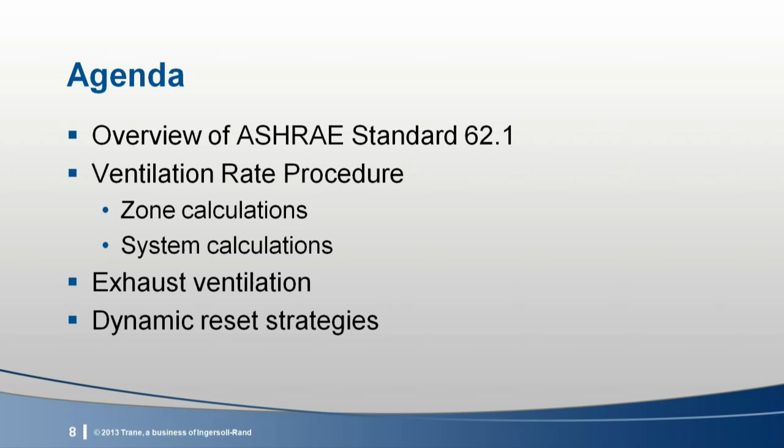During today's program, Trane Applications engineers Dennis Stanke, Paul Solberg, and John Murphy will take us through a discussion of the requirements of Standard 62.1, with specific focus on the ventilation rate procedure for calculating ventilation requirements. Dennis, who is a longtime member and recent chair of the Standard 62 Committee, will start us off with an overview of this standard. Then the guys will step us through how to use the ventilation rate procedure to determine the ventilation requirement for each zone and how much outdoor air must be brought in at the system level intake. And later, Paul and Dennis will touch on exhaust requirements and discuss various dynamic reset strategies for saving energy required to condition this ventilation air.

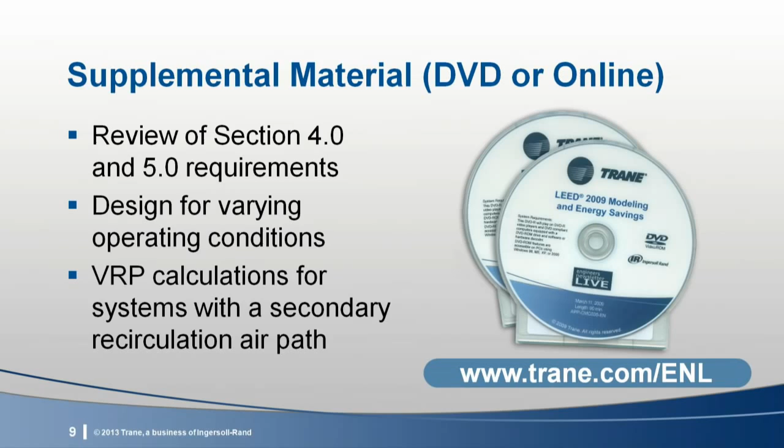Dennis, go ahead and get us started.

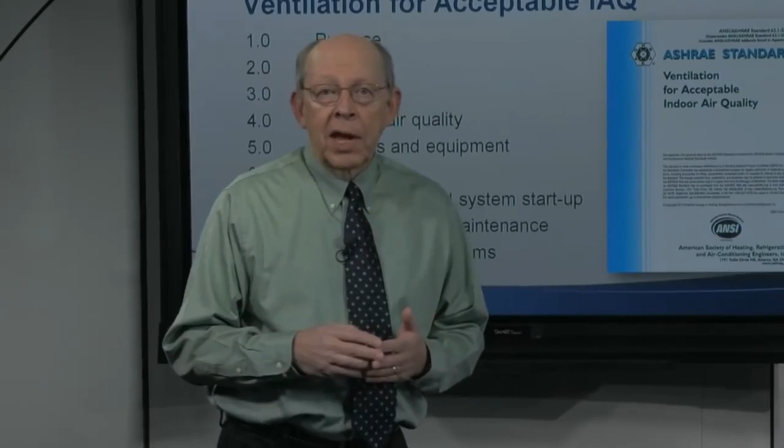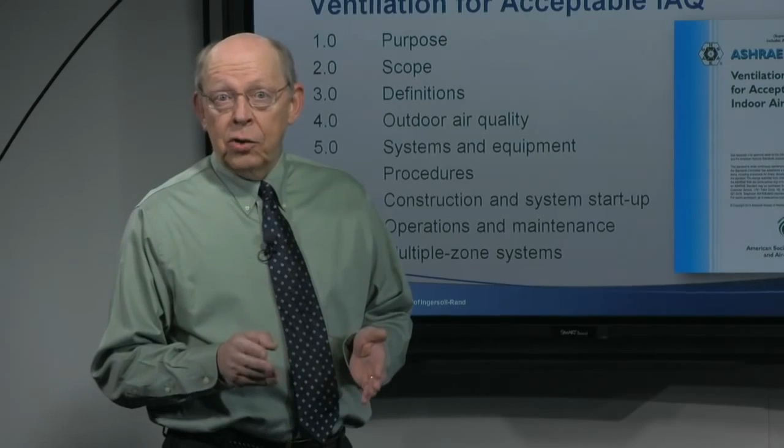Okay, first I want to thank all of you for watching these presentations. We've been doing them for many years, and I hope that you find them of value. I don't know how many of these I've been involved with, but I'm happy to say that this is my last one. So in case I forget to say it later, I've enjoyed talking to you periodically, and I hope that you continue to attend long after I've retired to New Orleans, for example.

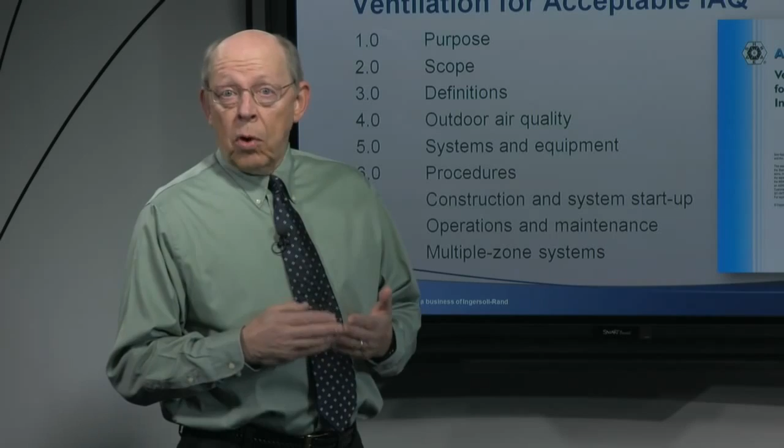Its requirements are organized in sections as follows: outdoor air quality assessment in Section 4, provisions for systems and equipment in Section 5, ventilation rates and calculation procedures in Section 6, construction and startup requirements in Section 7, and finally, operation and maintenance requirements in Section 8.

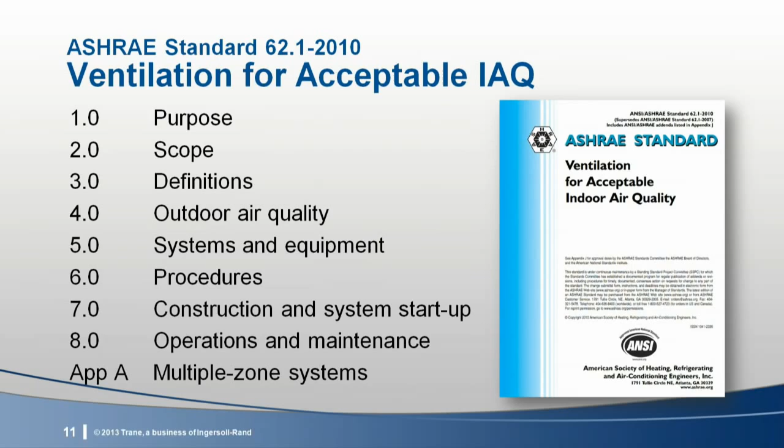Normative Appendix A, which expands on Section 6 requirements, is also part of the standard. The standard is written in mandatory language so that it can be easily adopted by codes and can be used as a solid technical reference document for other standards, for energy labels, and for building rating systems.

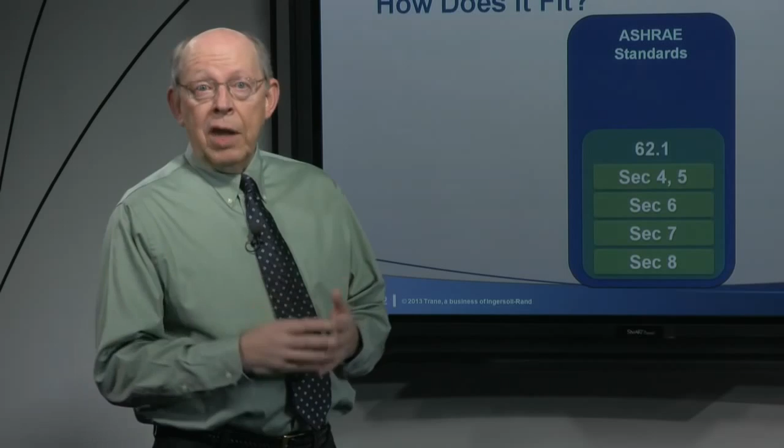This diagram attempts to show how the standard fits. First, here's Standard 62 broken down by section. Traditionally, Section 6 is most important for the model mechanical codes and many local building codes. Its ventilation rates and procedures appear in over 11,000 code jurisdictions.

To comply with ASHRAE Standard 189.1, the High Performance Building Standard, building designs must meet virtually all Standard 62 requirements. And the International Green Construction Code allows Standard 189.1 as a project compliance option. Projects following this option include all Standard 62 requirements referenced in the Standard 189.1 document.

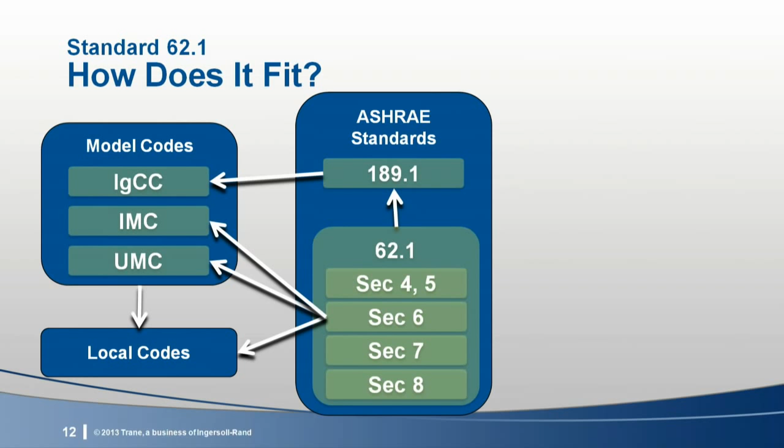Some building owners want to pursue a building energy label, like Energy Star or the ASHRAE Building Energy Quotient label. To comply with the Energy Star, all 62.1 requirements must be met. And since the ASHRAE BEQ label requires Energy Star compliance, again, all 62.1 requirements must be met.

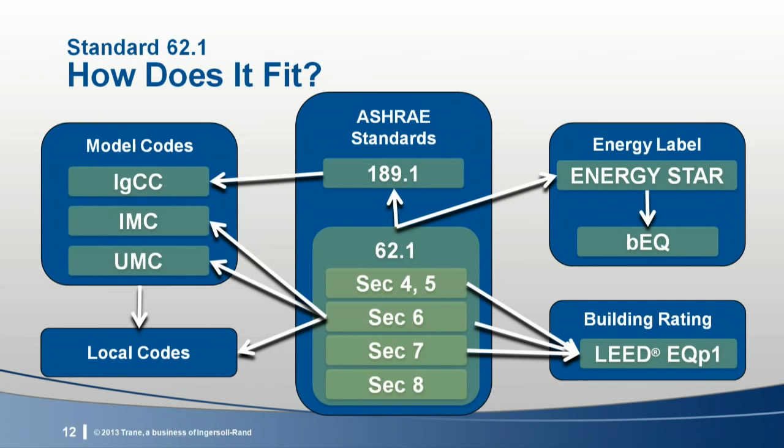And of course, many building projects these days seek LEED certification. The first LEED indoor environmental quality prerequisite requires compliance with the provisions in sections 4 through 7 of Standard 62.1. So you can see this ventilation standard provides the basis for building codes, energy labels, and building rating systems.

Okay, back to the standard to give you that quick overview that I promised. Section 4 addresses outdoor air quality. It requires designers to consider potential outdoor contaminants both in the region and immediate vicinity of the building site.

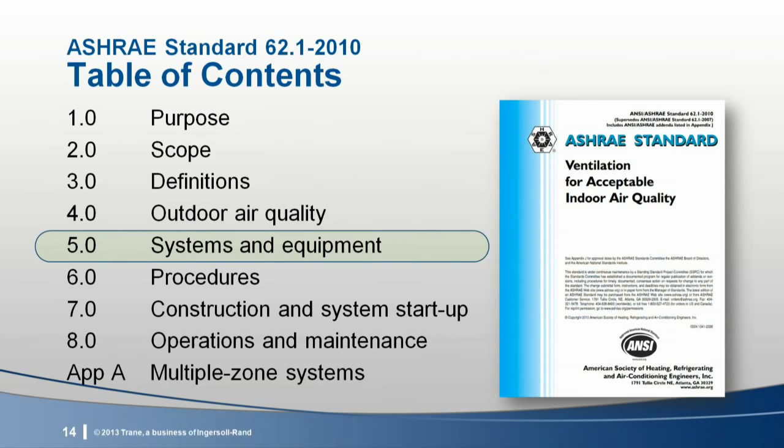Section 5 covers a broad range of requirements for ventilation systems and equipment. When met, these requirements should help to establish a baseline for building contaminant emissions so that the prescribed ventilation rates and procedures in Section 6 can actually be expected to work.

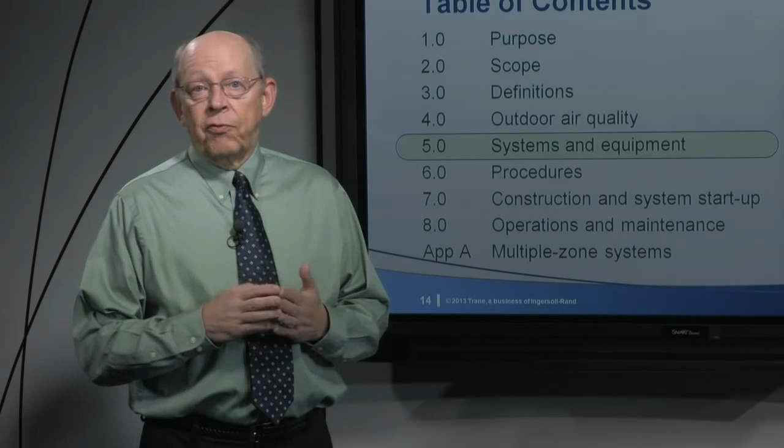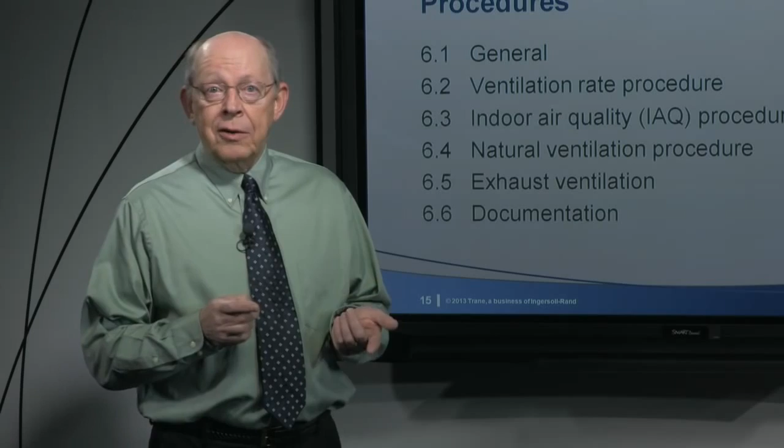These sections cover a lot of ground, so we've included them in the supplemental material since we want to focus on Section 6 today. Turning now to the procedures for finding design ventilation requirements in Section 6, the standard includes 3 alternative design procedures for finding minimum outdoor airflow rates: the ventilation rate procedure, the IAQ procedure, and the natural ventilation procedure.

And it includes exhaust airflow requirements in a separate section because they apply regardless of the design procedure used to determine the minimum outdoor airflow rates.

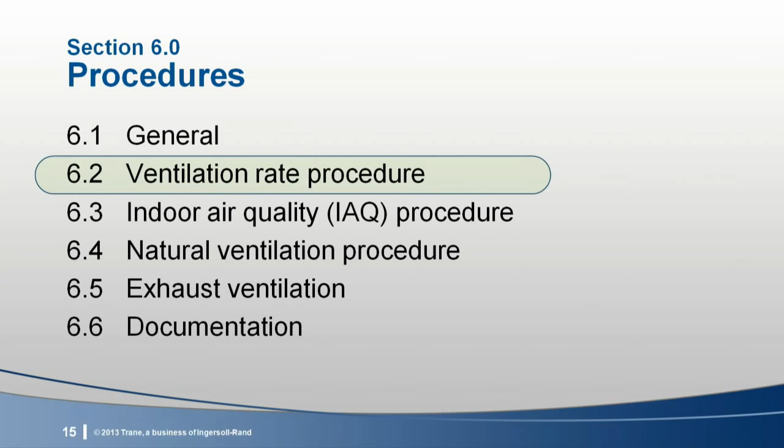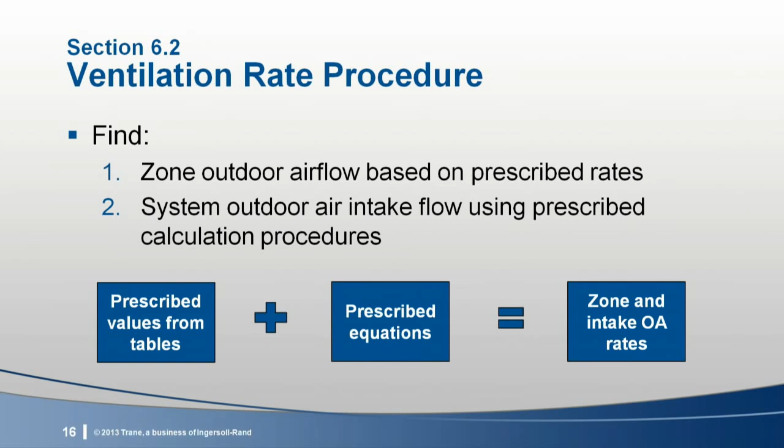The ventilation rate procedure is most widely used. It prescribes zone-level outdoor airflow rates in a table, and it prescribes equations and calculation procedures needed to find both zone and system-level rates. Most designers understand it and use it, and it's the basis for mechanical codes. Of course, it has a few tricky spots, so we'll go over an example a little bit later.

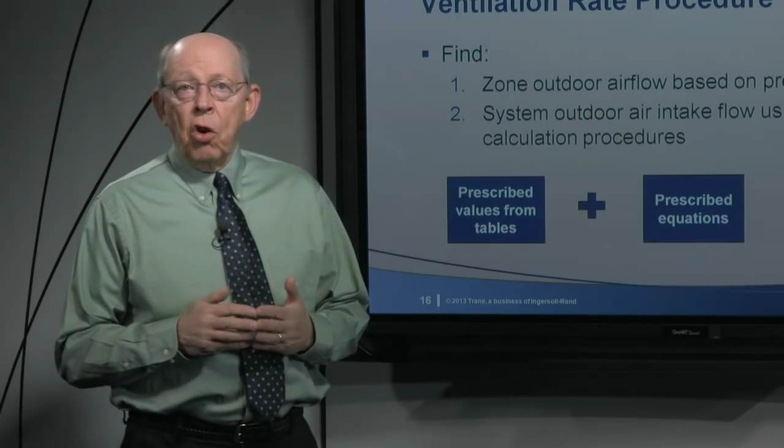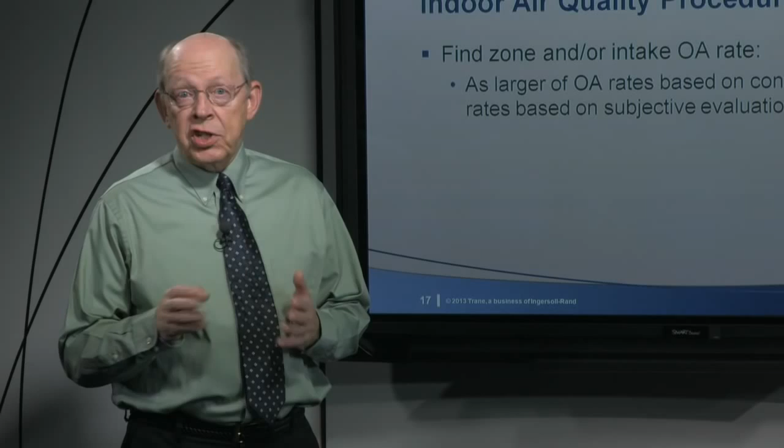Next is the indoor air quality procedure. Designers find minimum zone and system intake rates based on contaminant levels and subjective evaluation, proceeding as follows. First, identify all contaminants and mixtures of concern, sources and source strengths, and target contaminant and mixture concentrations. Second, use mass balance equations, accounting for any air cleaning devices, to find the zone and intake rates needed to control contaminant levels.

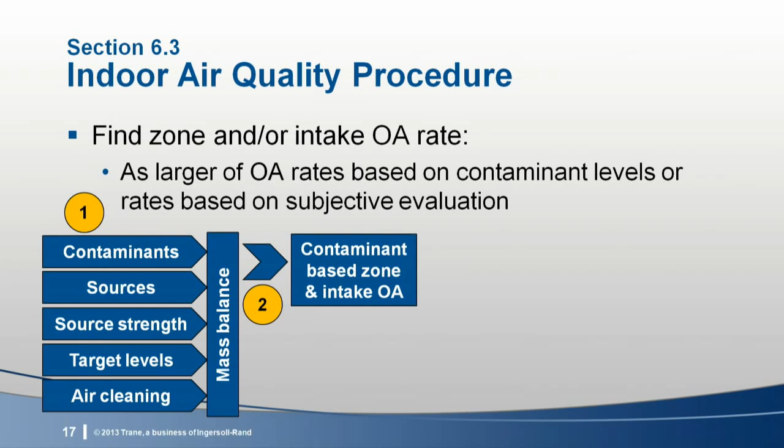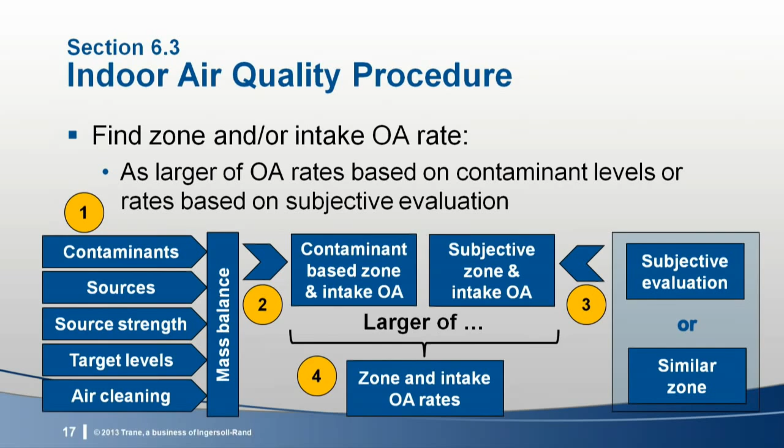Control contaminant levels to less than or equal to the target concentrations. Third, in the completed building, use a subjective evaluation in each zone to find zone and intake rates that satisfy occupants, or use the rates found by subjective evaluation in a substantially similar zone in an existing building. Finally, compare the zone and intake rates found using the mass balance approach to those found using the subjective evaluation approach, and use the larger of these rates.

Designers must perform both a mass balance analysis and a subjective evaluation to comply with the IAQ procedure. This requires a lot of work, a lot of judgment, and risk, not to mention a variance from most code authorities. That's why very few one-of-a-kind building designers pursue it, why Standard 189.1 doesn't allow it, and why LEED has traditionally not allowed it. It's probably best suited for buildings with repeated identical designs, like retail chain stores.

I recently wrote an ASHRAE journal article about the IAQ procedure, showing in detail how it might be met. We included a reference to this article in the bibliography, but we're not discussing it in detail today.

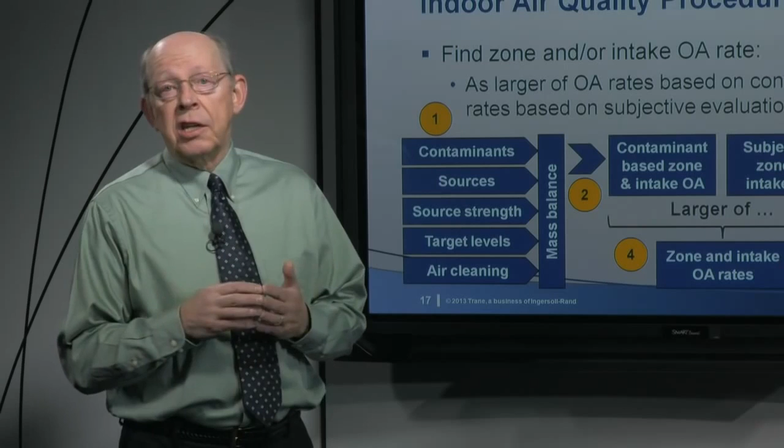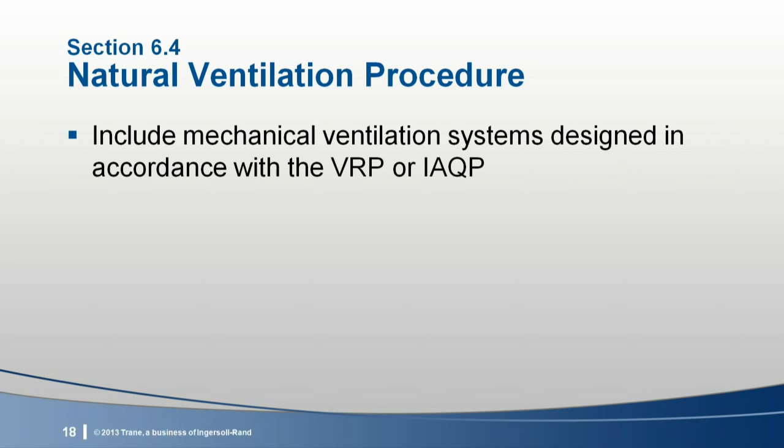Finally, the natural ventilation procedure provides for passive ventilation using only natural forces to move outdoor air through the zone. It requires that any natural ventilation system also include a mechanical system designed using either the ventilation rate procedure or the IAQ procedure. A mechanical system is needed to provide outdoor air during those times when the local openings must be closed.

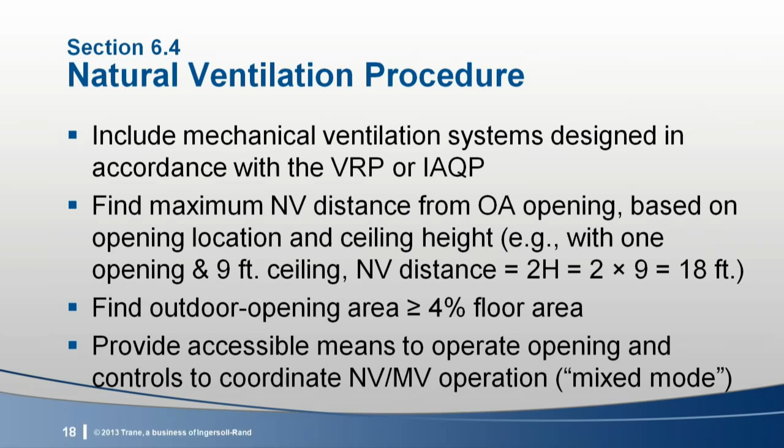To comply, first find how far outdoor air can be expected to penetrate into the occupied zone. This depends on the location of openings and the ceiling height. Next, find the area of the outdoor opening. It must be no less than 4% of the naturally ventilated floor area. Finally, provide readily accessible means for occupants to adjust the outdoor openings and provide controls to coordinate the operation of natural and mechanical ventilation systems.

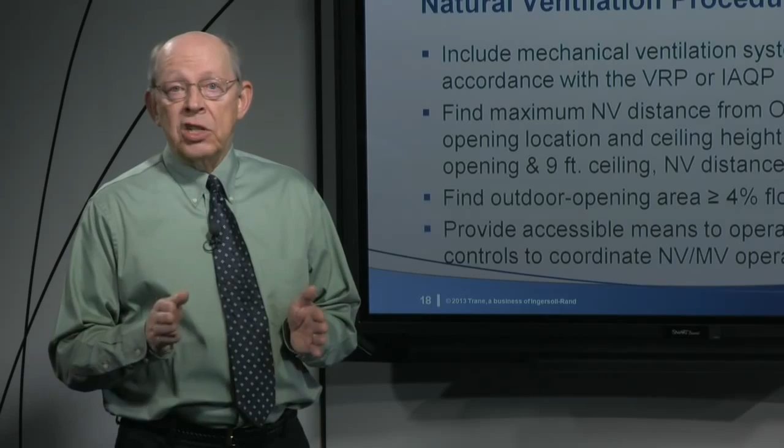Mixed mode ventilation is required because virtually all naturally ventilated buildings need mechanical ventilation at some point. For example, occupants may close local openings due to rain, wind, heat, cold, outdoor pollution, outdoor noise, and so on. As with the IAQ procedure, we're not discussing the natural ventilation procedure in any detail today.

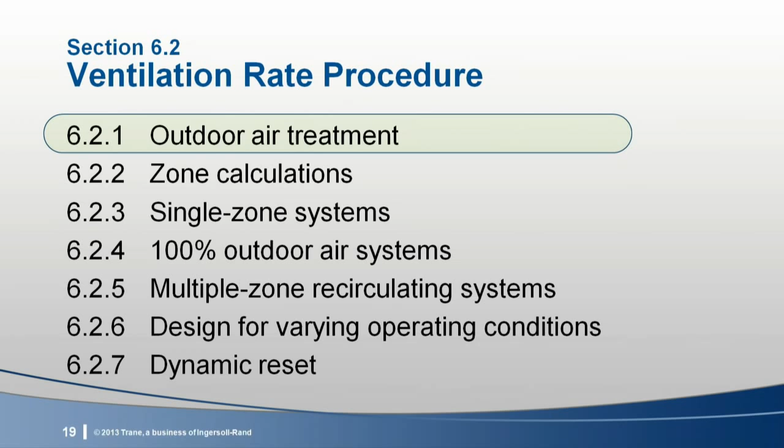Today, we're focused on the ventilation rate procedure. It covers outdoor air treatment, zone level and system level outdoor airflow calculations, an optional averaging approach to design for varying operating conditions, and an optional control approach to reset outdoor airflow dynamically.

Before we turn our attention to ventilation calculations, however, I want to briefly discuss outdoor air treatment. We use outdoor air to dilute and remove indoor contaminants. But since outdoor air itself can contain contaminants, in some geographical locations, the standard requires outdoor air cleaning between the intake and the occupied zone.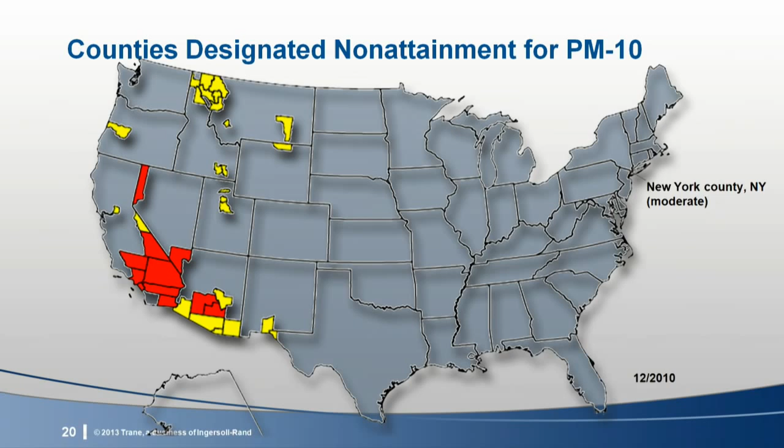Air handler fans must be selected to provide the required airflow whether the filter is clean or dirty. Finally, the ventilation rate procedure requires 40% efficient ozone air cleaners in non-attainment areas where the average daily maximum 8-hour ozone levels are very high, above 0.107 parts per million. Here's the latest EPA map for ozone non-attainment areas.

According to Appendix E, only buildings in Riverside, Kern, Los Angeles, and San Bernardino County in California need ozone air cleaners. But these designations change, so designers should check the EPA 8-hour ozone status for any planned building site. Buildings located in ozone non-attainment areas other than Southern California don't need air cleaners to meet Standard 62, but designers might want to consider using them anyway.

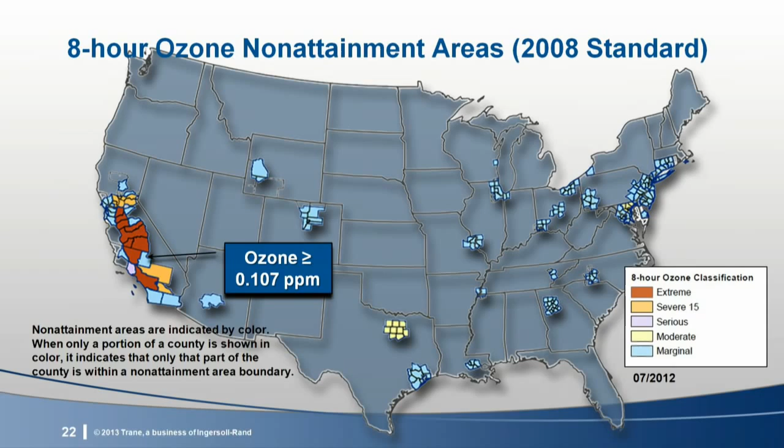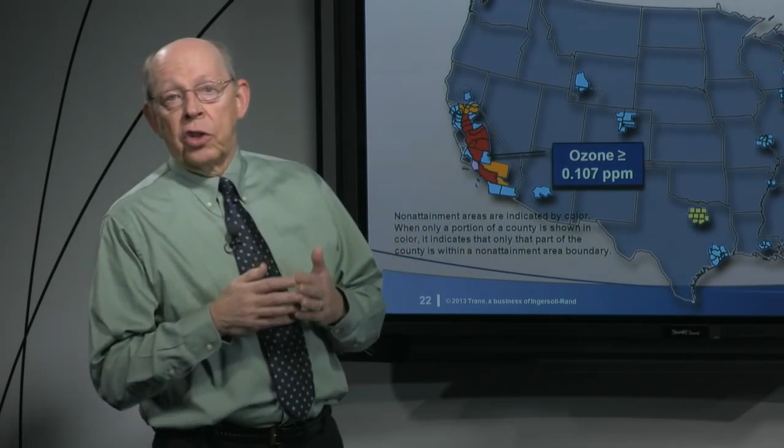After all, breathing ozone is harmful, and besides that, if you're designing a high-performance building, Standard 189.1 requires 40% efficient ozone air cleaners in all ozone non-attainment areas, which includes most of California and many major metropolitan areas throughout the U.S. As Dennis mentioned, we're only going to focus on the ventilation rate procedure for today's program. This procedure includes both zone calculations and system calculations.